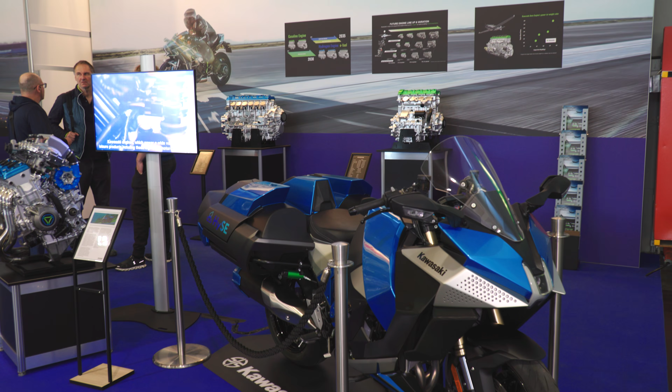When you hear Kawasaki, you probably think motorcycle first, but they have always been involved in aerospace engineering as well, especially in the early 20th century, developing fighter aircraft and engines. Now what they've learned from motorcycle engine design is coming full circle in informing a new generation of piston aircraft engines.

So let's start with the history of Kawasaki and the development of aviation technology over time.

Kawasaki, as a company, was founded back in 1878, so we do have a very long history. We are part of Kawasaki Motors, which is the division where we focus primarily on recreational products known by Kawasaki Motors and other products as well. The history of Kawasaki motorcycle actually started from Kawasaki Aircraft Company back in the days, where we designed and manufactured aircraft as well as aircraft engines. Since then, the motorcycle business started, so really our roots have started from the Kawasaki aircraft business. So today we're bringing in the Kawasaki motorcycle engine technology, and we're just back to where we started the business.

So let's talk a little bit about the technology that you've developed for motorcycles, some of the things that you have learned from motorcycle engine design and how that can translate to aviation.

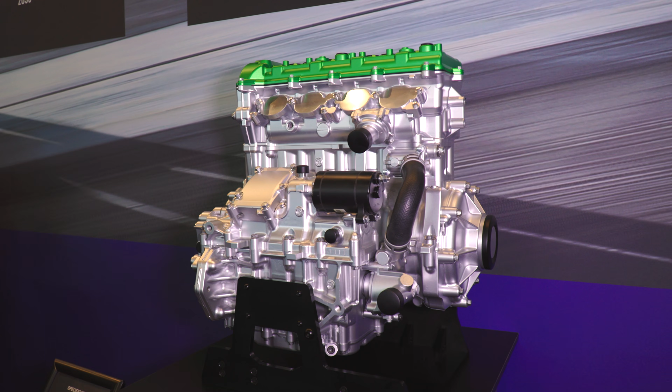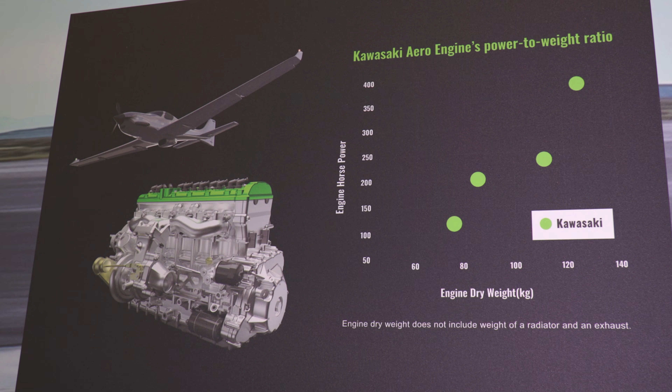The product offering which Kawasaki has today, almost every one of them is powered by gasoline engines. And when I say gasoline engines, it's not just regular gasoline engines. We have a lot of requirements and restrictions, and the biggest part of it is all of our engines have to be very compact and light-weighted, especially talking about the motorcycle engines. The engine always has to fit between your two legs, you can't make it a bulky, heavy engine. The vibration has to be well-tuned. So lots of requirements, and by designing and manufacturing those engines, we have learned a lot over the decades. That experience and knowledge, we are bringing over to the aviation engine.

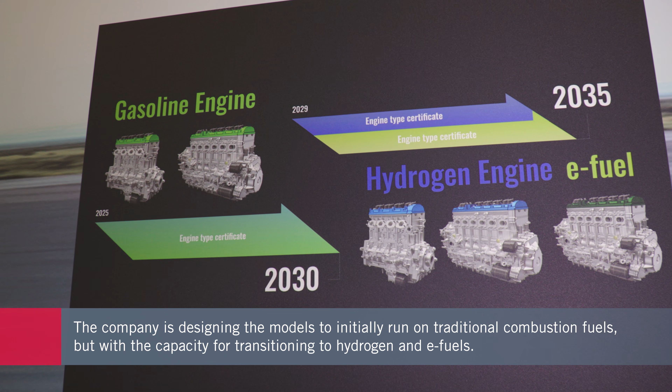Looking ahead, hydrogen is something besides electric and hybrid which Kawasaki has been working very hard on. This motorcycle is a result of Kawasaki working with other major Japanese automotive companies back in Japan. Back in May of 2023, we formed a research body among Honda, Suzuki, Yamaha, and Kawasaki. Toyota Corporation is also part of it because they have a long history of working on hydrogen passenger cars. So those companies formed a research body with the idea of working together rather than competing, especially when the development is still at an early stage and we all have to learn a lot going forward.

This is one of the test vehicles which we brought to the public last year. We had a demonstration run at the Suzuka circuit back in Japan, and we have participated in two Dakar rallies, back in 2024 and 2025. So things are moving forward.

The reason why we do hydrogen is, again, just to provide the option to the market and the customer. We're not trying to push the market in a direction, because in the end the market and the customer are going to decide what they want. All we can do as a manufacturer is provide options, and that's what we're trying to do here.

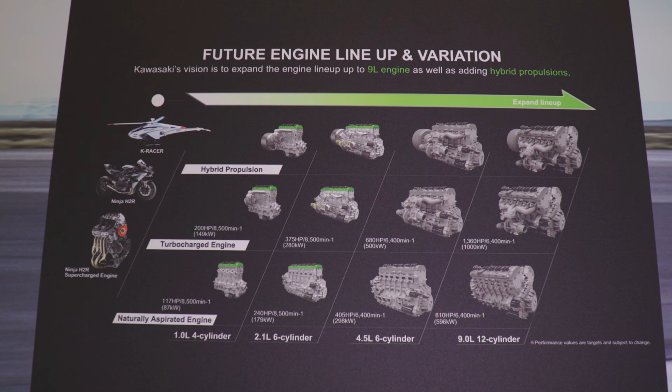So let's talk about the aviation engine development and the timeline that you expect, maybe to start your first testing, if you know that, and how that's going.

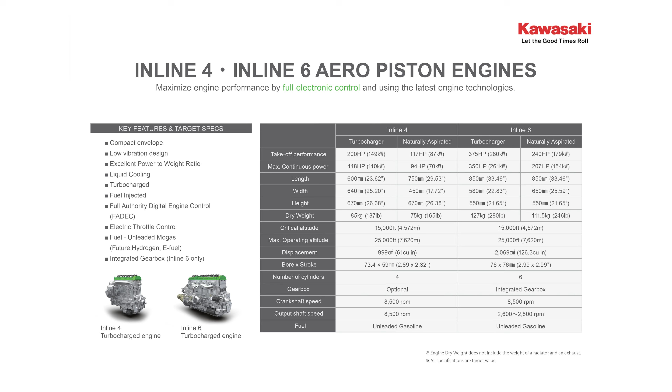Currently the engine is under development back in Japan, where the R&D research testing is happening. We are still at the early stage of development, however the testing is happening right now, and the results we have been seeing so far are very promising. Our goal is to have the engine certified by 2030. So yes, it will be several years out from now, but as a Japanese manufacturing company, we want to make things right, so we will be taking a very step-by-step approach.

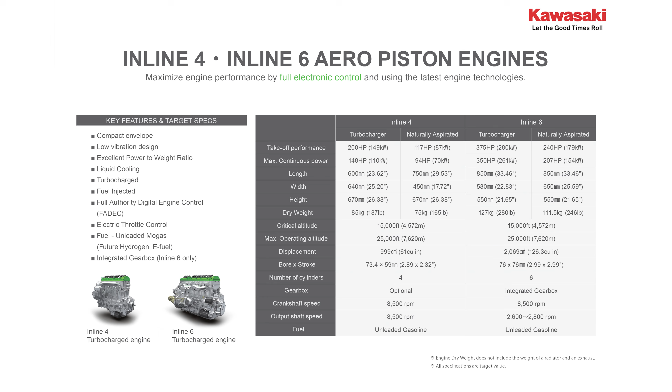So by 2030, you will be seeing our engine in the market.

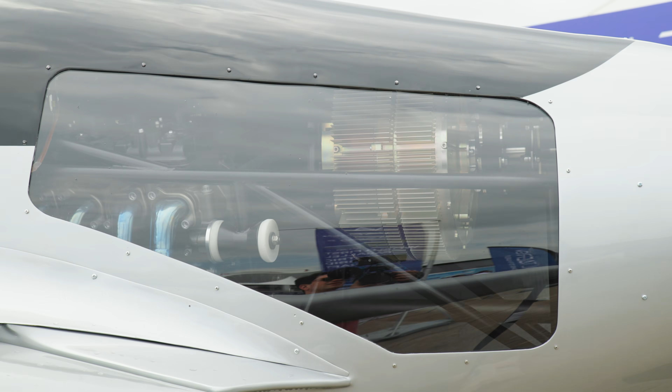Let's talk about the one collaboration that you can tell us about in the aviation industry. We have a working relationship with a French startup company called VoltAero. What they do is hybrid propulsion aircraft, so the idea is they will be using the Kawasaki engine and merging it together with a motor to make it a hybrid aircraft. Our part is to provide the engine and work with them, and that's moving forward.

Is there anything that you think people misunderstand about what you're doing, or is there a common question that you get that you would like to clarify?

So we're here with an automotive background, obviously. We do have a motorcycle engine here, but what we are trying to do is not simply bring the motorcycle engine into the aviation industry and hope that it'll work for the customer in the market. Yes, an engine is an engine, but we are well aware there is a clear difference when it comes to engine requirements. One example is that the motorcycle engine is something where we set the engine speed from the lowest RPM all the way to the highest RPM for the customer to enjoy. It's just how we do it.

However, on the aircraft engine, the engine setting should be very different. Some of those things we are well aware of, and we are making those changes as well. Our aviation engine is going to be a clean sheet, ground-up new design engine, so it's not going to be a motorcycle engine. However, the foundation, the experience, and the craftsmanship will be brought in from the motorcycle side.